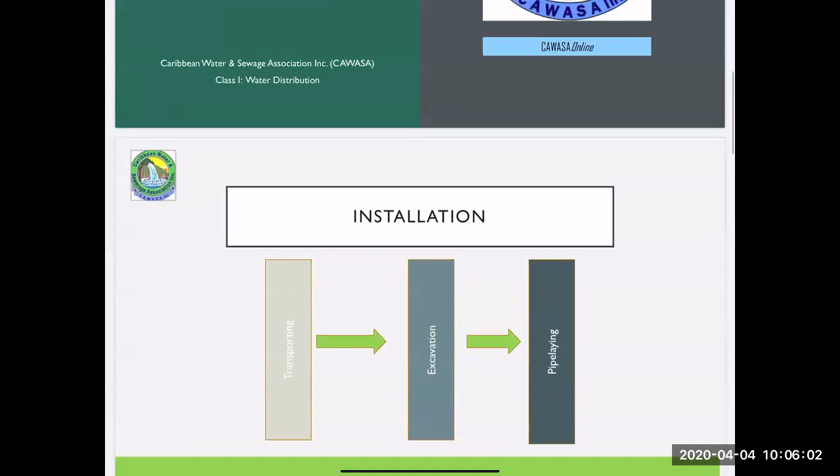And I'm starting with safety because I think it's an area that sometimes we forget how important it is, and we go along our way until something bad happens and we realize we should have done this or we should have done that. So I want to start with safety to point out how important it is, because no matter how certified you are or how much information you have, if you are dead, you are useless. If you're dead, you can't do anything for the utility.

You cannot do anything for your family. You cannot do anything for your country. Okay, I say useless in that sense. So you've got to gather all the knowledge and have all the skills, and if you're not being safe on the job, it means you're risking your life, and losing your life on the job is not an option. So we want to make sure that we are safe.

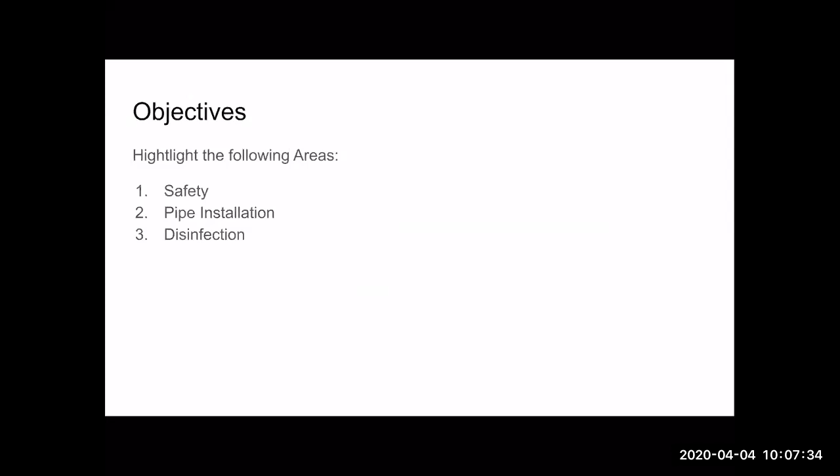But I'm starting with safety. And when we are on the job, the requirements for safety of employees and individuals on the job is set by an organization named OSHA, Occupational Safety and Health Administration. And OSHA looks at all areas of health and safety in a workplace, and they set regulations for what has to happen.

Now, when it comes to water distribution, there are quite a few areas where operators can be in hazardous conditions or deal with hazardous chemicals, and these things have an impact on your health. So while it's important for you to be able to do your job on time, as efficiently as possible, it is also important for you to be healthy and safe.

So I want to point this out. This is mentioned in one of the videos, and it's a term that will come back again and again as you go through different items in water distribution. Usually, whether it be a confined space, a trench, or any other area that presents hazards, an inspection by a competent person is required.

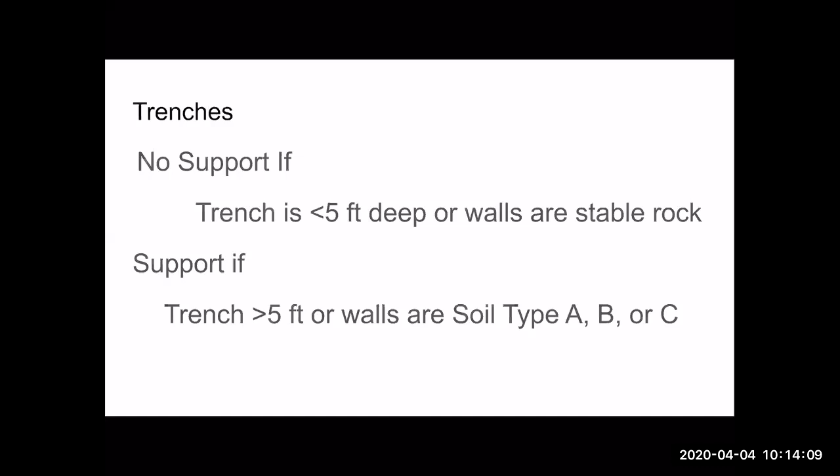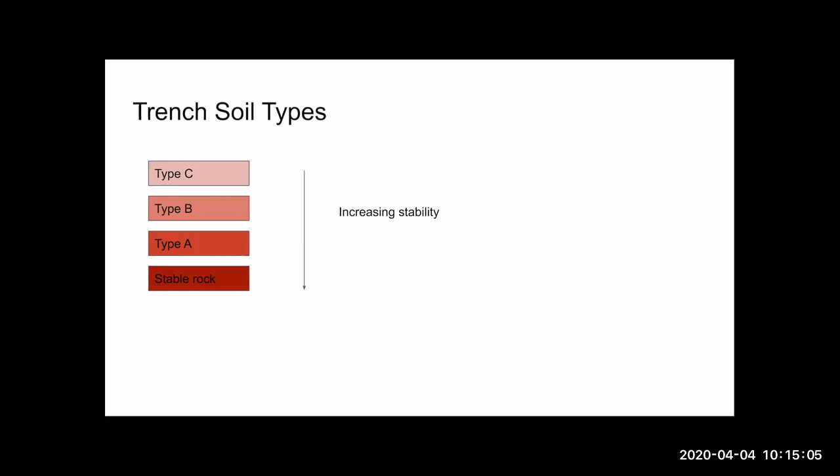It's important to remember this: if it's stable rock, and the competent person has inspected it and concluded there is not a likelihood of a cave-in, then we have no support. So we look further.

These are some of the types of support that we can have: sloping, benching, shoring, shielding. Now the content goes through sloping, shoring, and shielding, but it didn't spend much time on benching.

The idea of benching is that you take a tiered approach. Think of the seats in a stadium - if you look at them from the side, they look like steps. When we do benching, we cut the trench so the walls step down towards where we're actually doing work, and that will prevent cave-ins from happening. This is a technique not only used in trenching.

If you're a student of agriculture and look at how things are planted on a slope, very often benching is used, where you have flat areas then a vertical area, flat, vertical - so you cut the land into terraces. This is used to ensure you have areas to plant and prevent material from eroding down to the bottom of the hill.

So it's the same concept we're using for trenches. Benching is also used for road construction, where you cut a road into a hill. You may see examples where you have this step-like approach to the slopes on the side of the road, and it prevents cave-ins and prevents erosion of material onto the road - it's a very good way of stabilizing the slope.

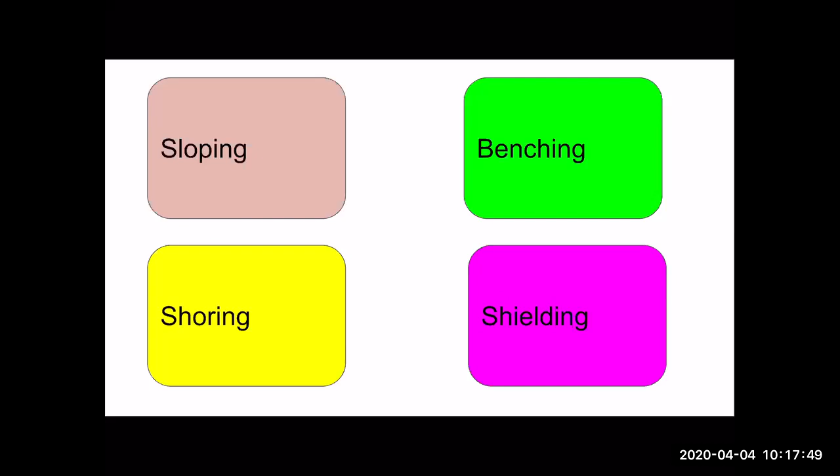Okay, so here the video discusses specifics about specific soil types. It gives you the angle at which the soil should be sloped for the various soil types.

For stable vertical walls, we can cut them at 90 degrees, providing that we watch the way we are digging and maintain the 90-degree wall. Because you could have the top cut at 90 degrees and then start to dig underneath the wall, and that could cause a cave-in.

So for stable rock, 90 degrees. Type A soil, 53 degrees. Type B soil, 45 degrees. And type C, 34 degrees.

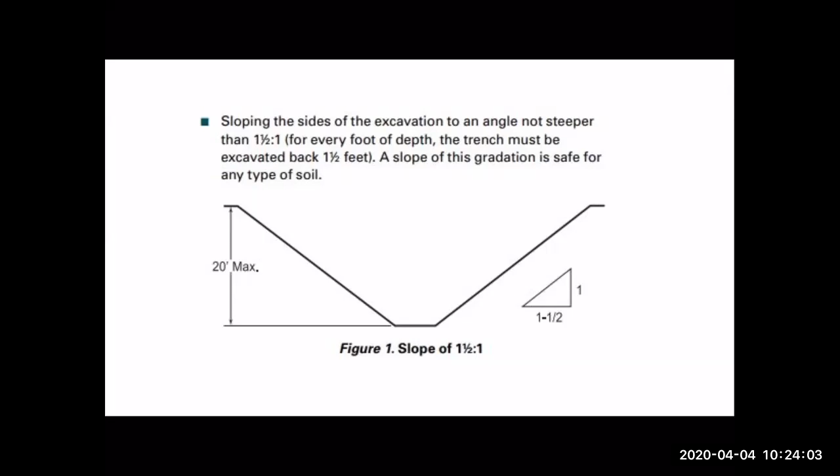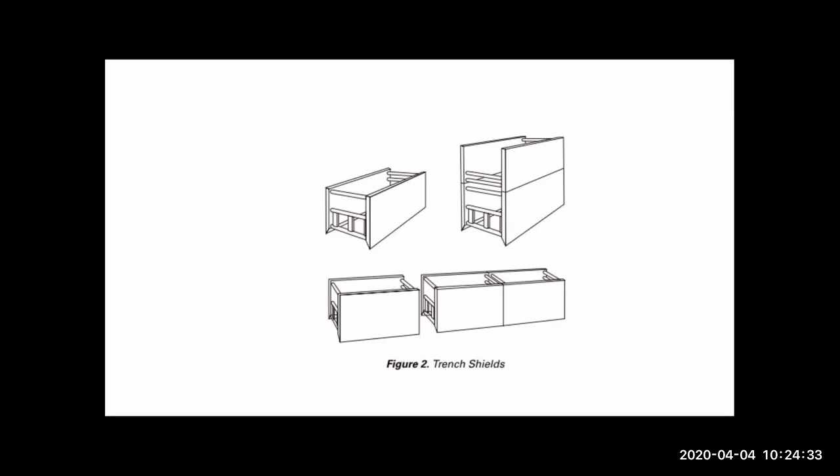Okay, so here's an example of the trench shields. I'm not going to go through endless pictures and examples, because I think the video does a pretty good job of discussing the different types of support for trenches. So if you did not look at the video, I encourage you to go back through the material; it was placed there so you can acquire that knowledge. Okay, so I'm going to move on.

Look at safety for disinfection, because in the process of pipe installation or repair, we have to do some disinfection. And if you look at the content, it mentioned two different types of chlorine we would use: the solid form of chlorine, and also chlorine solution.

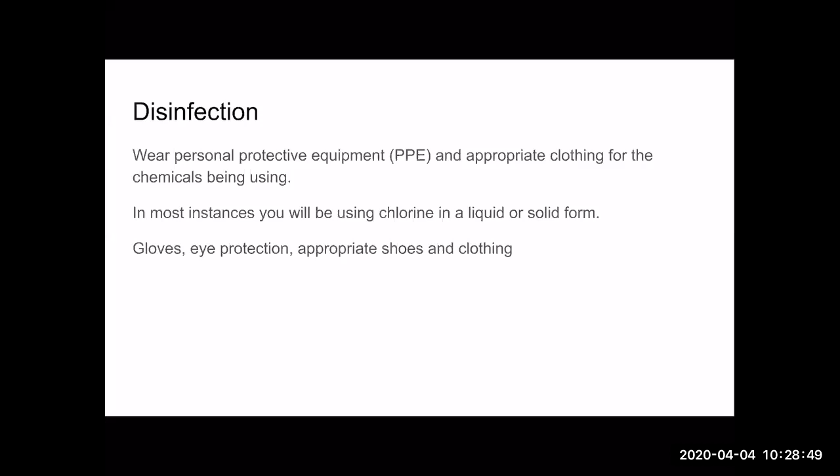Okay, so I'll move to the next slide. Pipe installation. Now quite a bit was done on pipe installation.

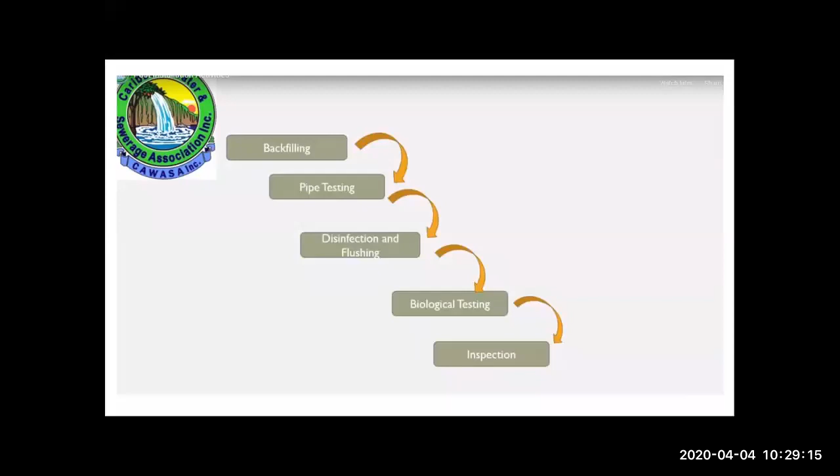What I did here, I just grabbed some screenshots from some of the videos just to highlight some of the things you need to know. Okay, this is a bit ahead.

I will pull up, I'll leave the PowerPoint. Okay, not open yet, waiting. Okay, so this is the presentation. You can find this in the downloadable resources section of the site.

Some of you may have downloaded it already, but this is the instruction on pipe installation, and I just want to quickly go through it. Okay, there's an error in the video in terms of the audio. I think when it starts talking about excavation, another term was used, and I think it's an error, not the appropriate term.

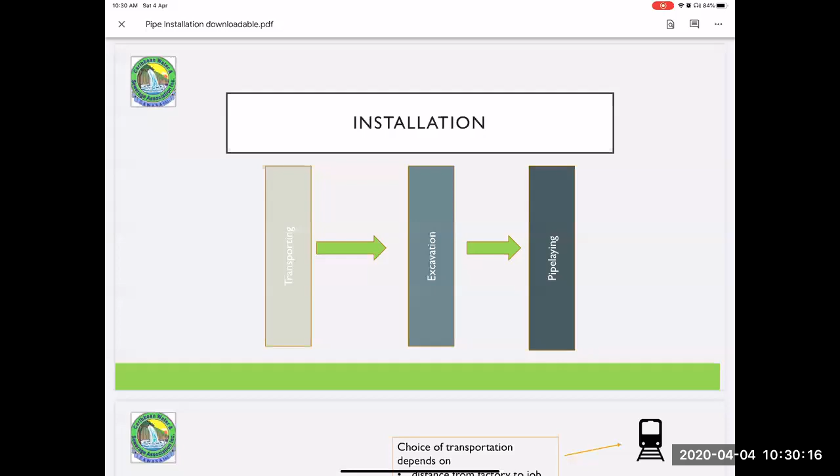Okay, the term should be excavation. So installation has basically three main areas that we consider. Somebody has a question? Avi.

Good morning, good morning. I'm hearing somebody talking. Karancha, do you have a question? Yeah, I'll assume that was an error.

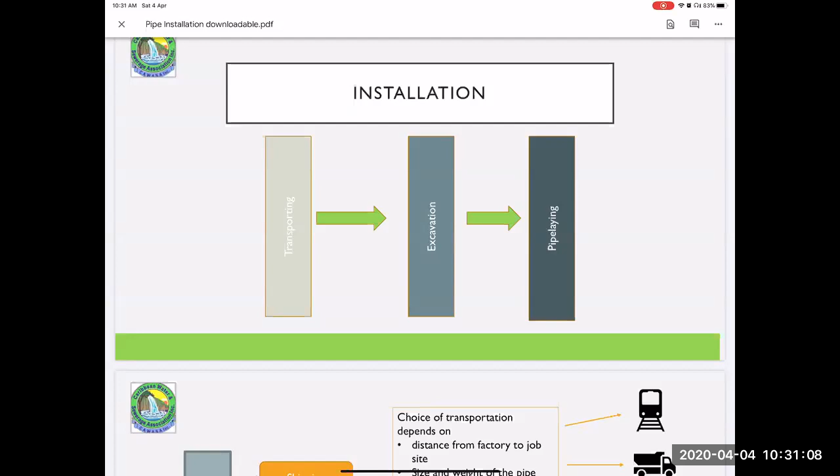Okay, so we have three different things we want to do for installation: transporting, excavation, pipe laying. For transporting, there are several considerations: what's the size of the pipe? We need to decide how we're going to transport it, and how we transport it will be based on the size and weight of the pipe, and the distance we are from the job site.

The point was made that most times we use trucks because we are small islands, so we use trucks to move pipes from one point to another. In larger places like the US, they would have railway or trains that could transport the pipe over longer distances. And in some instances, they may use ships to transport the pipe.

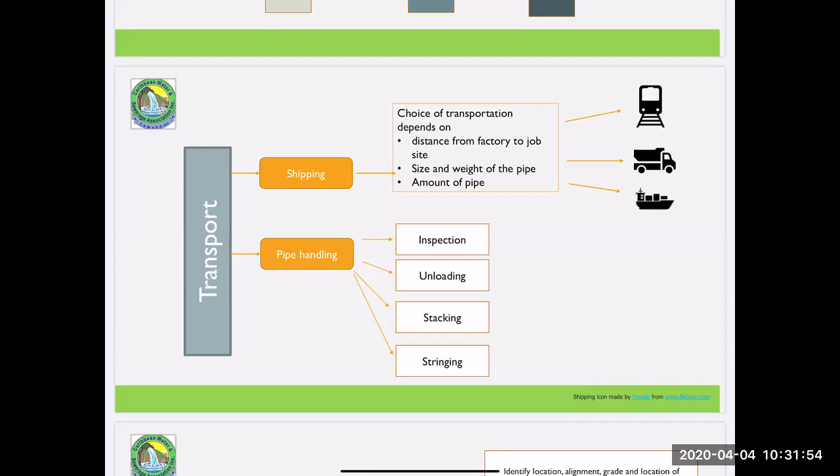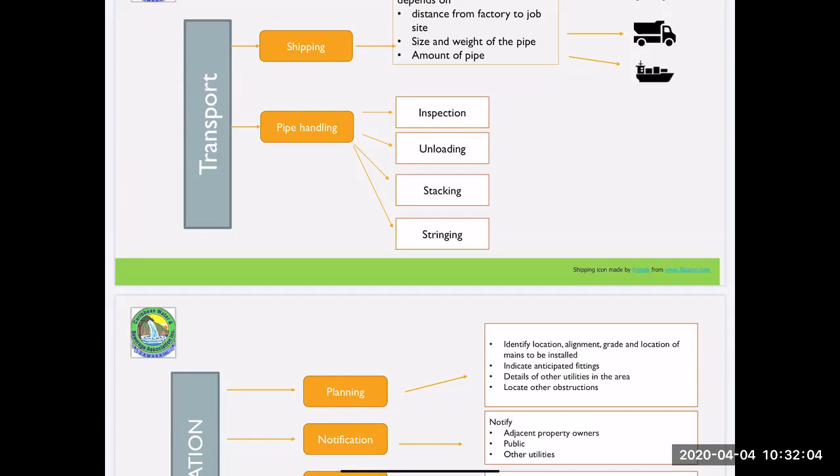So transporting for us would be trucking, basically. Pipe handling is something that comes under transporting. And in pipe handling, we want to do inspection, we want to unload, stacking, stringing.

The inspection is particularly important because we are spending money to excavate and install the pipe. We want to make sure the pipe we put down in the soil, wherever we're installing it, is in good condition. So we want to inspect the outside of the pipe as well as the inside. In some instances, based on the type of pipe, these pipes have special coatings on the inside, and we want to make sure these coatings are intact so we do not negatively affect either our flow of water or the quality of the water. We don't want to affect either of these things.

So the pipes must be inspected, and we inspect the pipes several times. We inspect it before we put it on our truck. We inspect it when we reach the site. We inspect it after we put it down. Because things can happen between the first inspection and the time the pipe gets to where we string it or stack it. Things can happen between these different events, and we want to make sure that before we lay the pipe in the trench, it is in good condition.